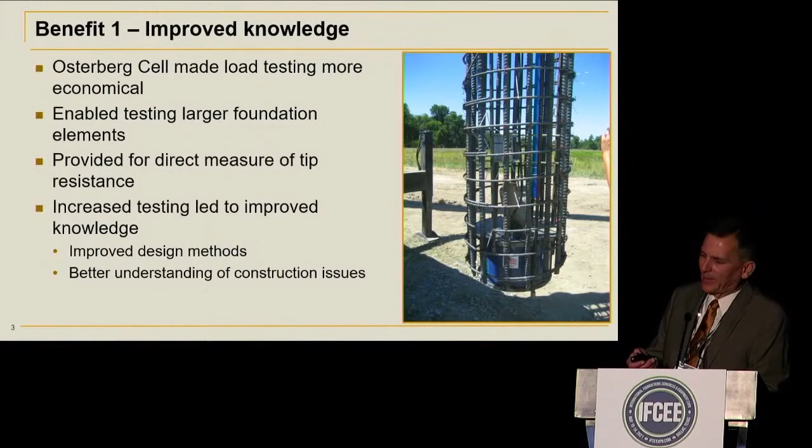By collecting all of this information, I really don't think it's an understatement to say that this dramatically improved our profession in many ways. I don't want to talk about this too long, but I'll give you one example—some work we did for the Missouri Department of Transportation about 10 years ago.

MoDOT began using drilled shafts around the mid-90s, and understandably had a conservative design posture. But because of the increased testing afforded by bidirectional load testing with the Osterberg cell, they were able to collect, through a series of projects and some funded research, a relatively large number of load tests, combining those with load tests from surrounding states. These are load tests in shaly materials—siltstones, mudstones, and the like—which allowed us in relatively short order to collect a large number of test results.

So we could look at design practices. At the time—and some people still use this—the method by Rowe and Armitage, which if you read their paper, was admittedly a conservative method, theoretically based along with some limited testing. Now, with the advent of the O-cell and collecting more and more load test data, you can see that plotted there. Not all of these data points actually achieved failure, and I'm looking at tip resistance at the moment.

If we isolate the tests that happen to achieve failure in tip resistance, you'll get a clearer picture about the conservatism that's inherent in that design method. The data points circled in yellow correspond to tests that actually achieve the ultimate tip resistance, or at least some tip resistance that would be considered failure.

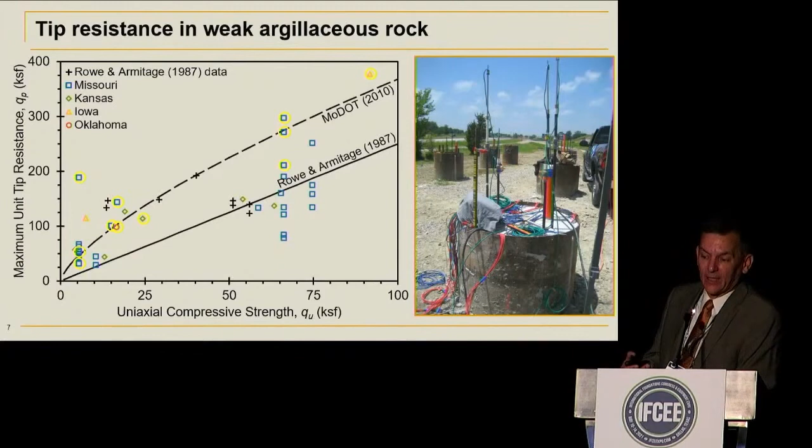But this really wouldn't have been possible without bidirectional load testing. We just wouldn't have had the funding to be able to do that many tests and the capability to achieve those results. So I think it's kind of unquestionable, the significant impact that bidirectional testing's had.

There are some additional benefits to bidirectional loading, and I'm going to move away from the Osterberg cell, so to speak, and just talk about other ways to do bidirectional loading. There are two more benefits, but the second benefit we can get from bidirectional loading is actually improved performance. This isn't about measuring the capacity or performance of a foundation, it's actually about producing an improved performance of the foundation.

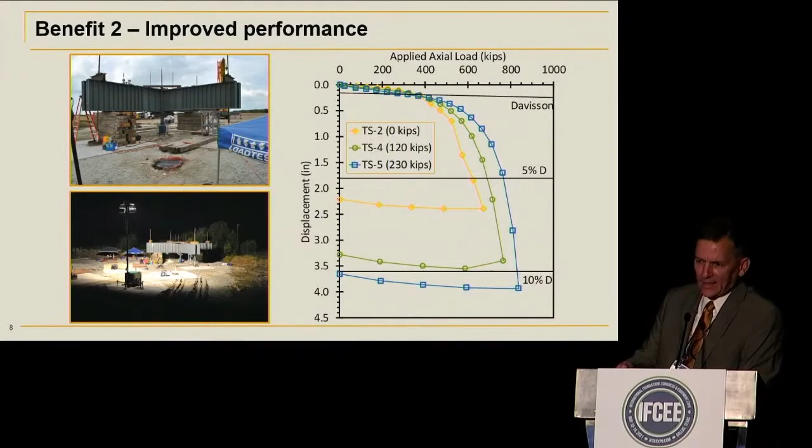So this is a mechanism for improving the performance of it due to that bidirectional load.

And so we're going to mobilize downward, or negative, side resistance as the post-grouting is occurring, trying to push up on the shaft. At the same time, we're going to mobilize positive tip resistance as the device is really pushing on the ground down below the shaft.

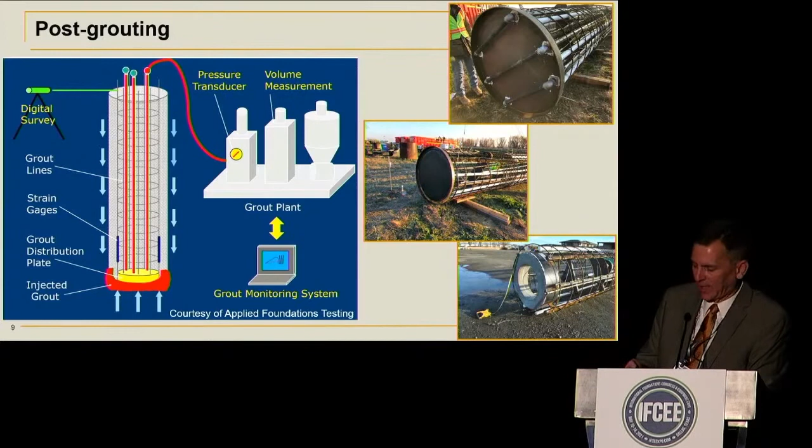So why is it that applying this bidirectional load produces improvement in performance? The concepts for this are really documented by Fleming out of the UK in the early 1990s. I'm going to go through a couple of slides that illustrate the concept — these are simple conceptual representations of load settlement response.

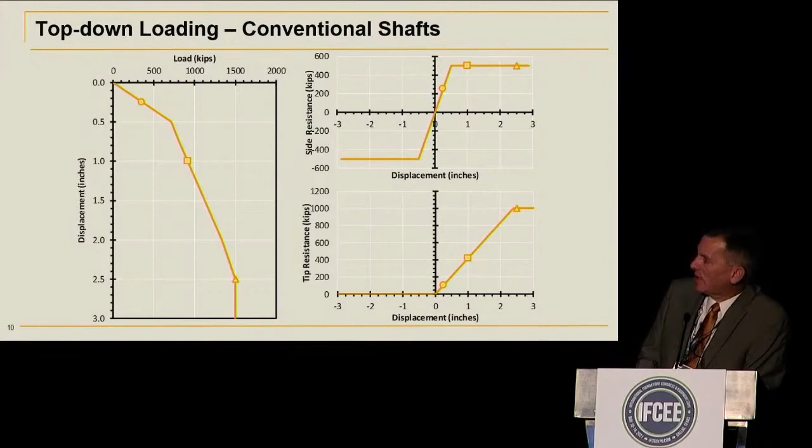We mobilize side resistance at relatively small displacements — we've fully mobilized it — and we've mobilized more tip resistance, but there still remains a considerable amount of tip resistance to be mobilized. Looking at an even higher load corresponding to the triangular symbol, that corresponds to a condition where we fully mobilize both side and tip resistance, representing the ultimate resistance of that shaft.

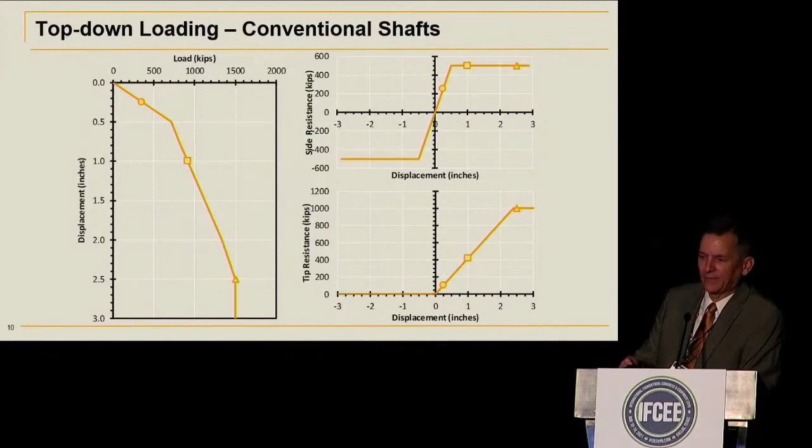So if I now consider this with bidirectional loading prior to top-down loading, essentially this bidirectional loading produces an initial loading from which the top-down loading then follows. Whether this happens because of a post-grouting operation or because of putting in some other kind of device doesn't really matter — this is a mechanical thing, not really a device-specific thing.

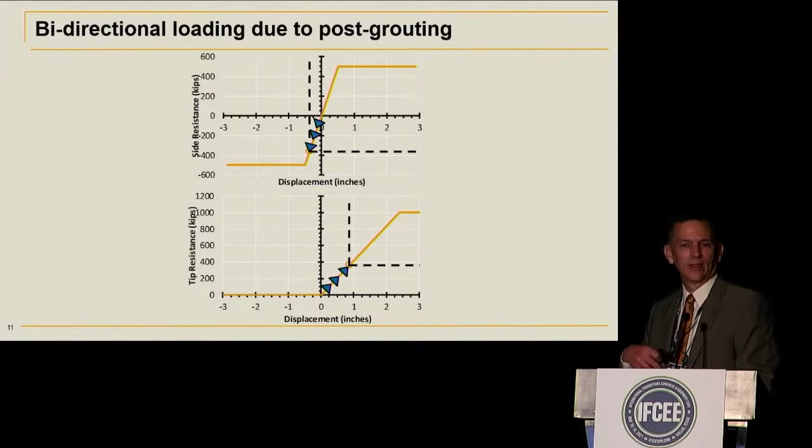When we apply bidirectional loading, we're going to be pushing up on the shaft above the tip, and pushing down on the ground below the tip. That's going to pre-mobilize some resistance, negative side resistance in this case and positive tip resistance. Essentially, that pre-mobilized resistance is going to influence the subsequent top-down loading.

It's giving us a new starting point from which we begin top-down loading. We can even think of it as residual load if you wanted to consider it that way. So what I've shown here is the top-down loading subsequent to that bidirectional loading, and the dashed coordinate axes on the figures on the right represent the loading that was pre-mobilized prior to subsequent top-down loading.

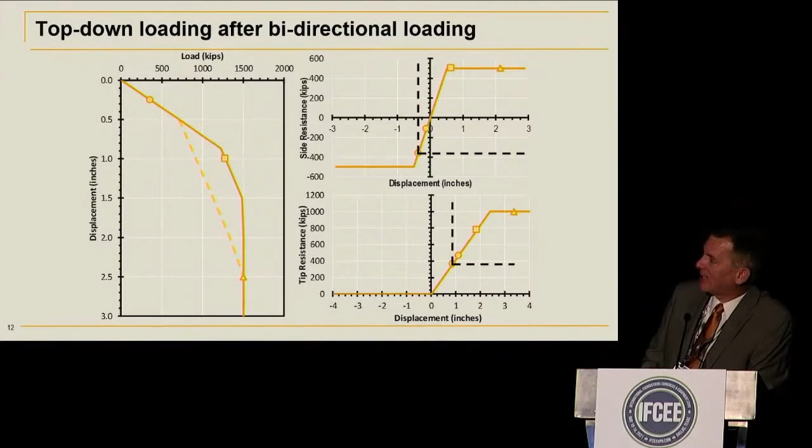On the load settlement curve on the left, the dashed line corresponds to the conventional shaft, and the solid line corresponds to a top-down load test after doing the bidirectional loading. You get this stiffer response, more resistance at a given settlement, less settlement at a given load, at least for the intermediate load levels. It's very similar at low load levels and the same at very high load levels. It's the intermediate load levels where we get the improved response.

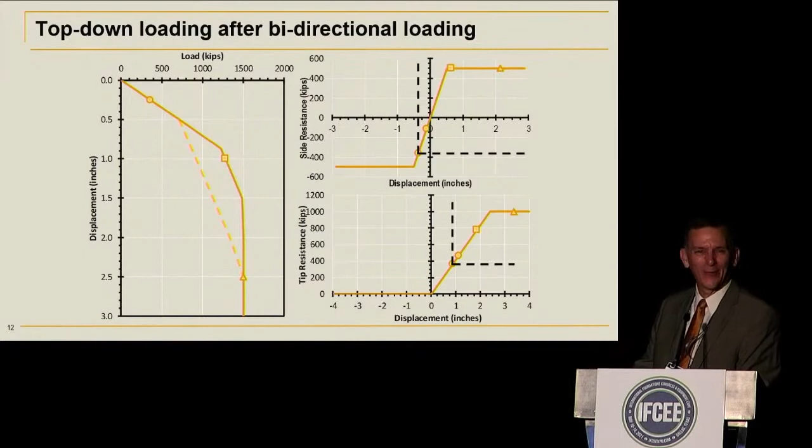This is a purely mechanical thing. There's no ground improvement involved with this. This is really just about preloading and the benefit that you can get from that preloading.

I'll show you some experimental measurements that confirm that concept, but an important piece here is that the degree of improvement depends on the magnitude of that pre-mobilized load. The greater the load you can pre-mobilize prior to the top-down testing, the better performance you're going to get in that subsequent top-down testing, which is a fantastic thing.

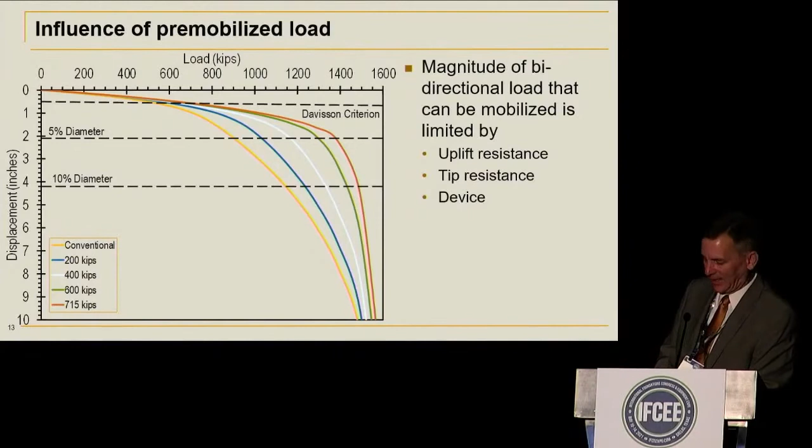So that tells you, okay, great, let's put a lot of load into the shaft. Well, that's great, and that certainly is an objective. But it's important to recognize that the magnitude of load we can mobilize in a bidirectional sense is limited by the least of uplift resistance of the shaft, the tip resistance of the shaft, and potentially the device, depending on the specific device. We can only mobilize load to a level where we exceed one of those limits, and we need to keep that in mind. I think that's a place where, in practice, we sometimes get ourselves into trouble.

In addition to the testing we did at Texas A&M, more recently we were fortunate to do some work for the California Department of Transportation, Caltrans, to look at this a little more closely. We did a similar load testing program where we tested one conventional shaft that wasn't bidirectionally loaded, and then three other shafts that were bidirectionally loaded. The load settlement curve for shaft T1 represents the conventional shaft, while the other three curves represent shafts that were bidirectionally loaded prior to the top-down loading, to a very similar load for all three shafts.

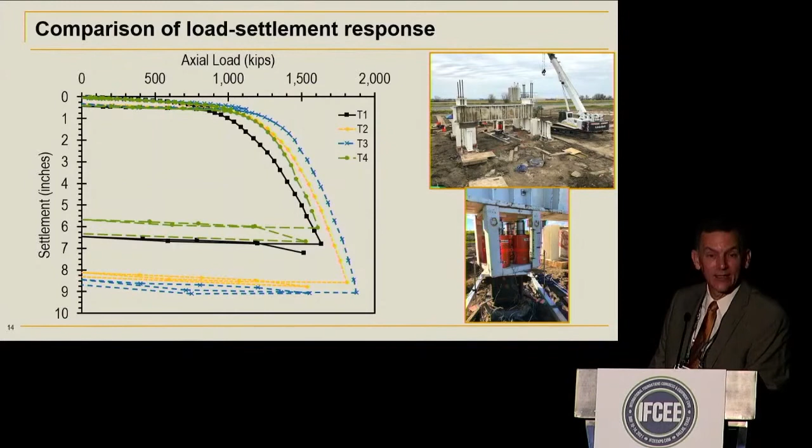Again, you see that we get this improved performance, more load at a given settlement, less settlement at a given load, for the shafts that were bidirectionally loaded prior to the top-down loading.

We can look at the load transfer a bit to confirm this. I'm looking at two graphs here. The one on the left corresponds to the loads measured along the length of the shafts during bidirectional loading and during the post-grouting operation, and you'll see we achieved a peak load at the tip of the shaft on the order of 400 kips. Following post-grouting, that load did relax a little, dropping down considerably, especially at the tip, a little less at the top.

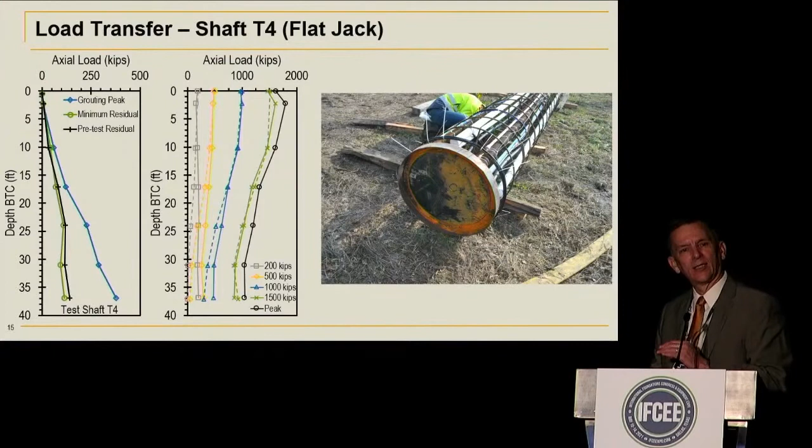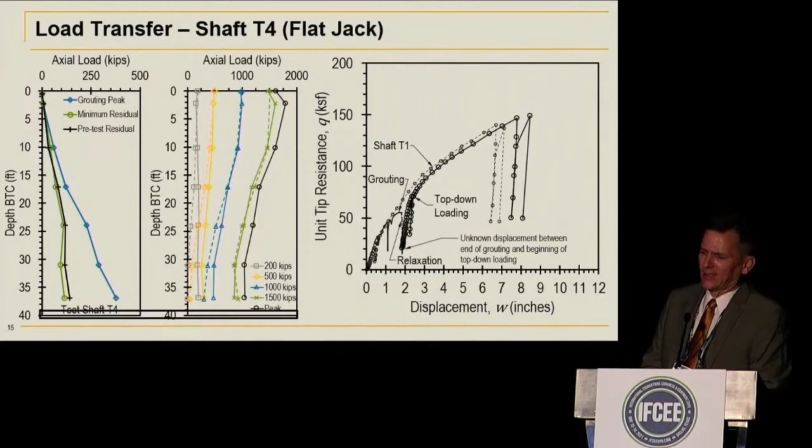It turns out that this relaxation, which I was quite worried about, is probably not something we need to worry about very much, because if it relaxes, we get the improvement in tip resistance, or an improvement in the tip response. If it doesn't relax, we get the transfer to the side resistance.

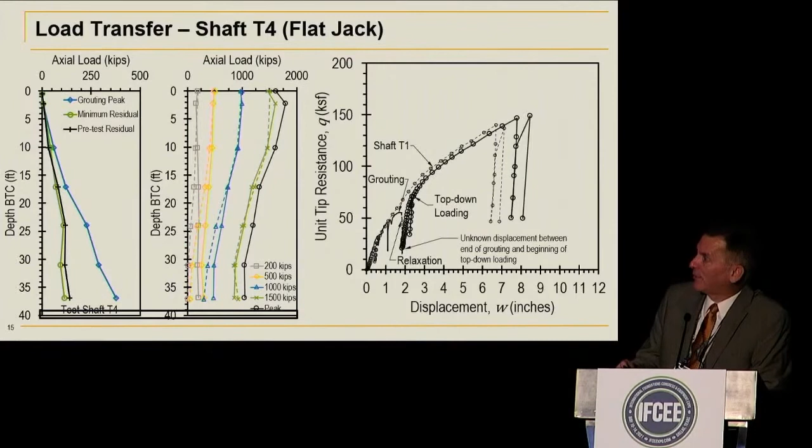So to summarize about this pre-mobilization concept, I think it's pretty clear. We've done these two experimental studies to really confirm that this is one of the mechanisms producing it, and really the predominant mechanism doing it. With an open-type grouting system, we can additionally get some ground improvement. I'm not arguing that ground improvement can't occur, only that this pre-mobilization of load is really the predominant mechanism for the improved performance we see with post-grouted shafts.

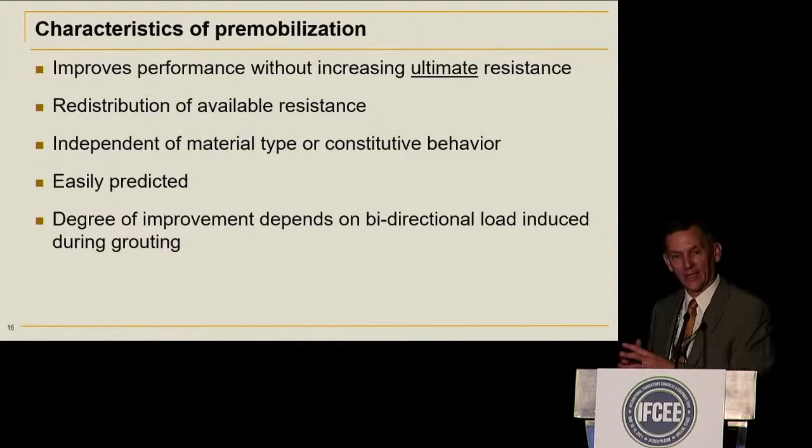It's an improvement in performance without increasing the ultimate resistance. I've underlined ultimate there because ultimate is not the nominal resistance that you get from most design calculations. That is the nominal resistance, a conservatively biased resistance. When we say ultimate here, I'm talking about the real ultimate resistance that we would get at very large displacements, something we don't get to measure very often, to be honest. In some ways, you can consider it to be a redistribution of available resistance.

And so again, it's not having this ground improvement. The most significant thing about this pre-mobilization concept, I think, is that it's independent of material type. This happens in sands, silts, clays, weak rock, strong rock, you name it. This is really about mechanics, not about some ground improvement that we're trying to do beneath the ground.

It's pretty easy to predict. You can predict it with relatively simple t-z analyses. You can even predict it with simple hand calculations, kind of like the conceptual diagrams that I showed you earlier.

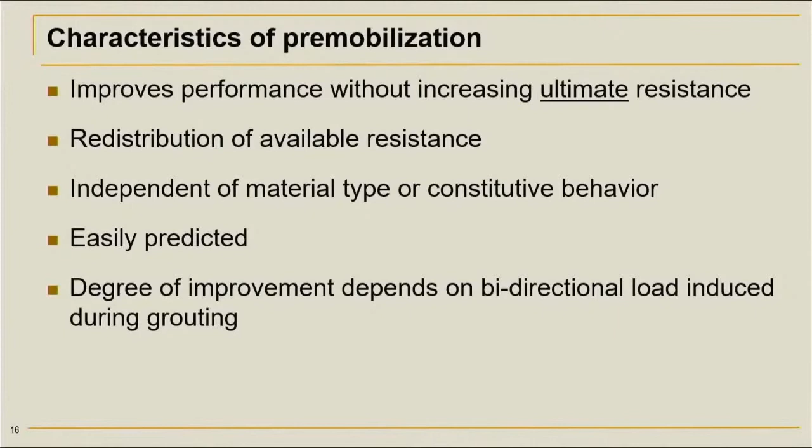The trick here is that the degree of improvement depends on how much load we can induce prior to top-down loading. The bigger the load, the better improvement we're going to get, and that's certainly the benefit. So I think it's pretty clear at this point that this is a reliable thing, something that we can predict, something that we can count on.

Unfortunately, it's a pretty difficult thing to try to implement, and Silas Nichols and I have had a number of conversations about how we can actually try to take advantage of this improvement. And it's tricky, not because the mechanics are difficult or unreliable, but because of the way that our design methods have really been developed.

Most of our empirical design methods are really displacement constrained, right? They're all, somebody's interpreting what the failure load is, either by some failure criteria or by the load that they achieved or other judgment on that part. And so when we talk about calculating drilled shaft capacity, that's not really the ultimate capacity. That's a number we've developed over time to use for our design, which is certainly fine, but it makes it difficult to take advantage of this improved stiffness we see from the bidirectional loading.

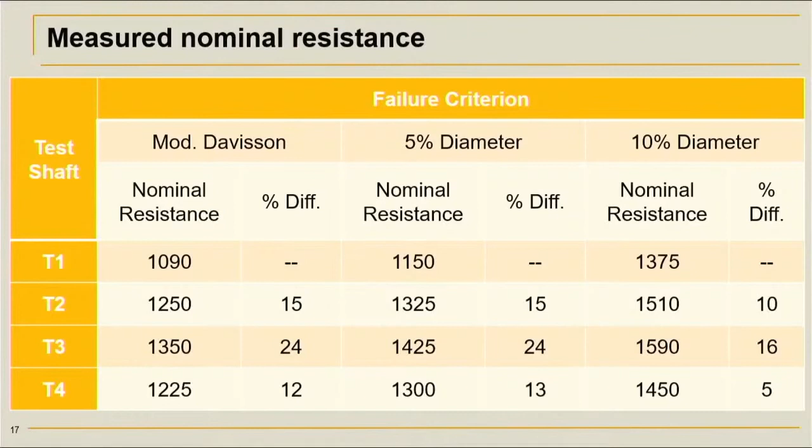So we can try to take advantage of that, and what I've summarized here is for the test that we performed in California. So T1, the first row of the table, represents the interpreted failure load for different failure criteria: using the modified Davisson criteria, a criteria that's 5% of the shaft diameter, and a criteria that's 10% of the shaft diameter. So you get different failure loads for different failure criteria.

The remaining three rows correspond to the interpreted failure load for the three shafts that were subjected to bidirectional loading prior to the top-down load testing. I'll focus you on the percent difference there. And what you'll see is it varies depending on the failure criteria you pick, and varies a little bit from one test to the other.

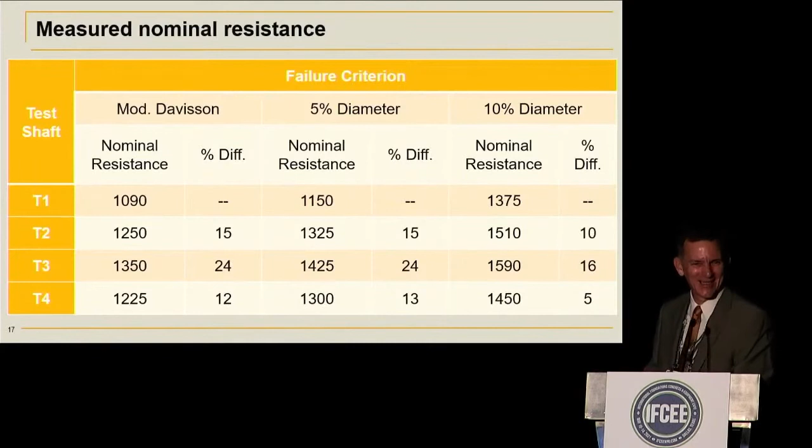But we're talking about oftentimes on the range of 10 to 20, to maybe 30% improvement in that design capacity that we can count on just from this bidirectional loading, which is certainly nothing to sneeze at, but it's also not 50%, it's not 100%. It's not huge, and so it tends to be a thing that's a little bit difficult to take advantage of.

Although one can certainly do that. So that's benefit number two: again, an improved performance because of this bidirectional loading, and I think that's certainly beyond what maybe I don't know what Dr. Osterberg was thinking, but I think that's probably a little more than he was thinking.

The third benefit is really improved reliability, and this is really, in my mind, a combination of the first two benefits. The idea here is, well, if we can go out and apply a bidirectional load with post-grouting devices or some other devices that are less reliable than a conventional bidirectional cell, but nevertheless applying some loading, well then, if we're applying load, then we're actually proofing the resistance of that specific foundation element to some level.

And so one of the things we can try to do is, if we're going to do that a little bit more economically, we can actually do that for every shaft. And so that really is a game changer in terms of the reliability.

And so now, instead of going out and doing one load test, getting an estimate for what the side and tip resistance are, and using that for the remaining foundations at a site, we can actually go out with one of these devices and proof load test every foundation element, much like we would do for ground anchors, where we actually proof load everyone.

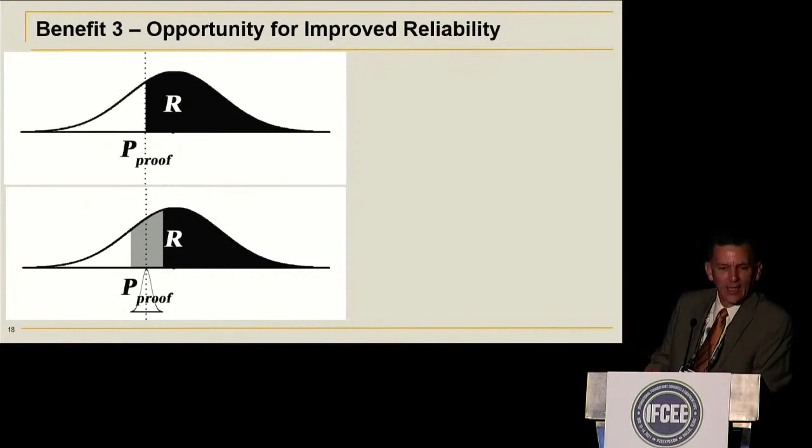Shadi Najjar and Bob Gilbert out of the University of Texas developed the math, the reliability calculations to do this, and we can use that with an uncertain proof load to actually calibrate resistance factors.

So you see the two dominant factors here in terms of reliability are: one, how reliable is the bidirectional load that's really your proof load, and two, what's the magnitude of that bidirectional load. As you consider a more reliable load and a larger load, a higher magnitude, you can actually use higher and higher resistance factors to achieve the reliability you're pursuing.

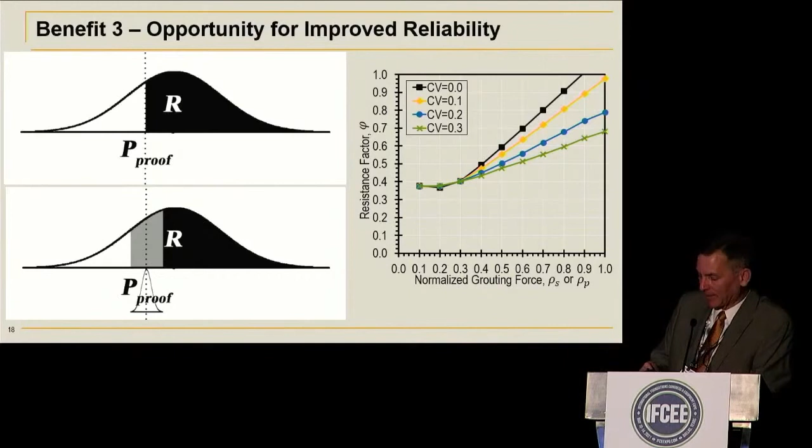We were developing these ideas around the time we were going to do the load test for Caltrans, so we decided to post-grout all of our shafts, including our reaction shafts.

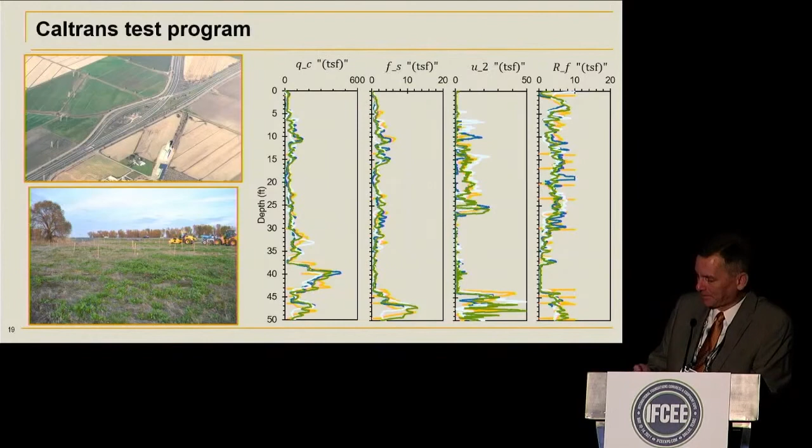This is the load test site, just north of Sacramento in the Sacramento River Valley, a couple of miles from the river in the floodplain. The site consists of about 25 feet of silty clay soils overlying another 20 feet of sandy soils that vary a bit in density.

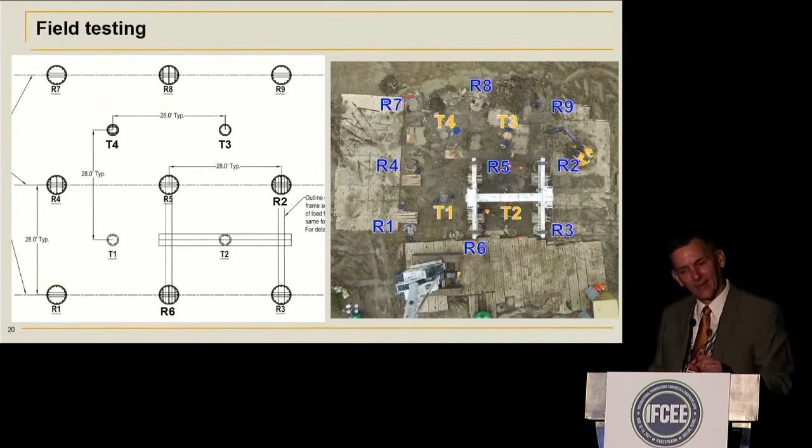The testing program here included 4 test shafts. Ironically, this pre-mobilization benefit can't be captured with a bidirectional load test—it produces benefit from bidirectional loading, but to capture it you have to do top-down tests. So we did top-down tests, which meant we needed reaction shafts. We took advantage of those reaction shafts by post-grouting and bidirectionally loading them to get an estimate of how reliable the load was from those different devices.

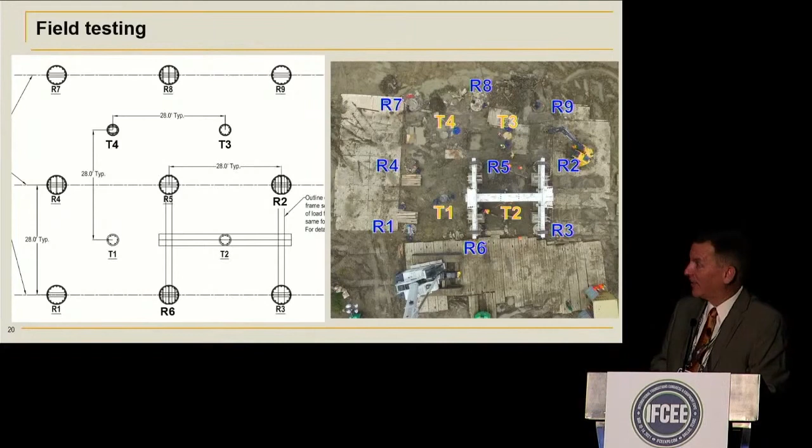We considered 3 different devices: an open sleeve port device, a closed flat jack device, and a rim cell for one of the reaction shafts. I'll show you those measurements, which we used to establish the uncertainty in the load being applied from these different devices.

I'll start with the flat jack device first. I'm showing 4 different graphs, associated with different reaction shafts: shaft 3, 5, 7, and 9. In each graph, the horizontal axis is the measured grout pressure during post-grouting, measured at the grout plant. The vertical axis is the measured force—the force measured using strain gauges installed just above the grouting device and monitored throughout the grouting process. What we're trying to look at here is how reliable grout pressure is as a measure of the actual force that was installed.

The green lines shown there, labeled as theoretical, represent the theoretical relationship between grout pressure—assuming it acts over the entire area of the device—and the force. What we'd like is for our measurements to follow those theoretical curves. There are two lines in this case because there's some ambiguity about the actual area of the device, but that's a pretty small issue.

For all four reaction shafts with the flat jack devices, there was a nice linear relationship between the pressure applied and the force measured, which is what we were desiring to see. If you look at the bottom two, at higher loads or grout pressures—around 1,000 kips—the relationship between grout pressure and force deviates a little from linear. Why that's happening is a subject of discussion and debate, but it's certainly what we observed experimentally.

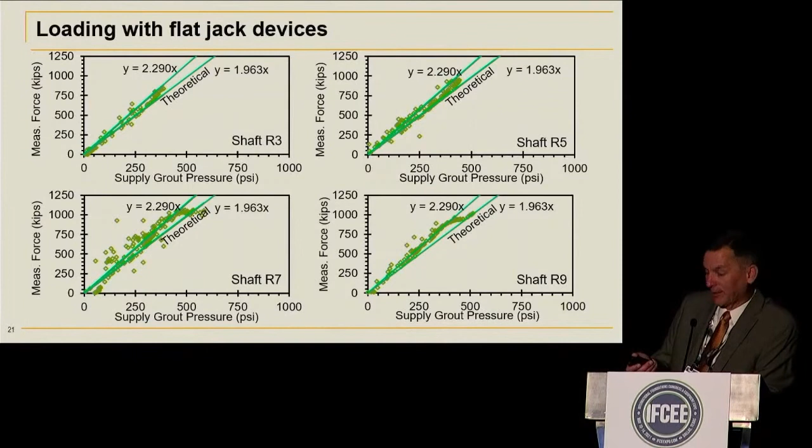As a result, for these open sleeve port grouting devices, I think it's mandatory that we install strain gauges and have an independent measure of load. You can't use pressure as a good surrogate for the load you're mobilizing—you need strain gauges to do that.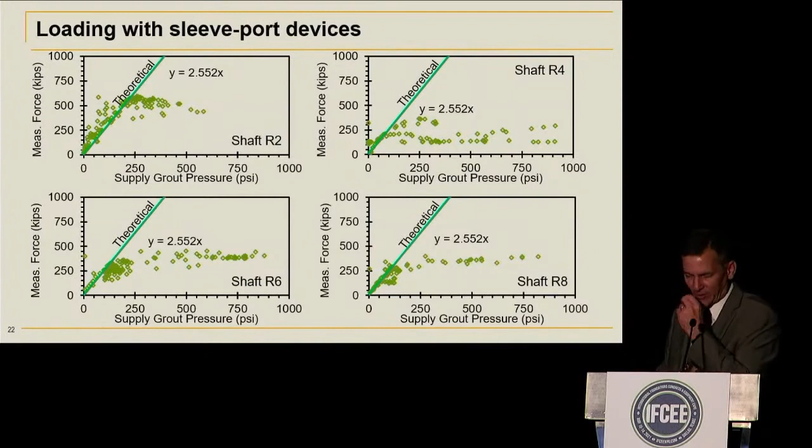With strain gauges, if you've interpreted them before, you know the stiffness of the concrete is a very tricky thing to deal with. Because of that, when interpreting load from strain gauges and dealing with the uncertainty in the modulus of the concrete, we assign a coefficient of variation of 0.25. Conservatively, we can argue that number is probably a little lower, but we assign that to the sleeve port devices.

We used one rim cell device on a reaction shaft, and also had a test shaft with rim cell devices. This rim cell is a proprietary device from Load Test that gets sealed up in the concrete of the shaft and is used to apply bidirectional load.

You'll see the data are scattered here, and I have to apologize a bit for that. For logistical reasons we used a grout plant appropriate for post-grouting to apply load using the rim cell, which would generally use a much smaller pump. We had a hard time with our vibrating wire instrumentation keeping up with the sequence of loading—it happened pretty fast. So some of the scatter is really a result of the pump we used, not so much the device itself.

But I think it's clear, if you look through the scatter a bit, that in both cases there's a nice linear relationship that matches the theoretical one. I will say we cheated a little bit.

There's an inference about the modulus here that we've made to match it up, but the linear part is really something that we measured, and that's the key. Based on these measurements and based on the fact that the rim cell is really a sealed up device within the concrete, we assigned it a coefficient of variation of 10%, just slightly less than what we would get with the flat jack.

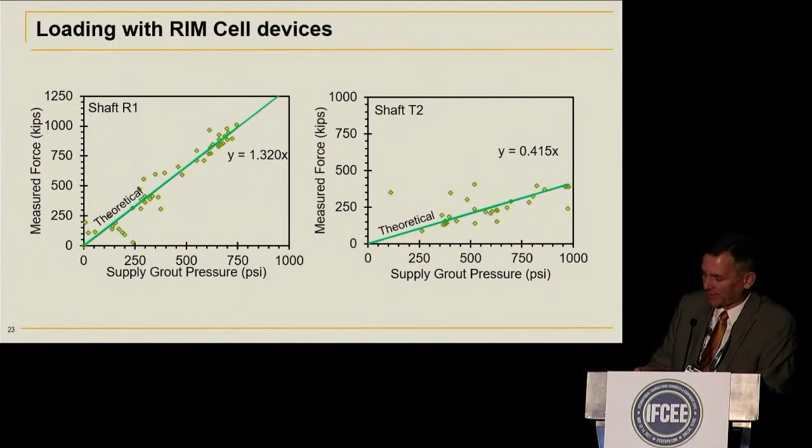I still think that's again from two shafts at one site. We need more measurements of this relationship to be able to better define that uncertainty, but that's what we use to do that. So if you put that all together, what we've recommended to Caltrans, as a means for trying to implement these concepts, is this graph.

The curves for resistance - this is the graph of resistance factor versus the normalized force from this bidirectional force. Three curves: one for the rim cell, one for the flat jack, and one for interpreting load from the strain gauges. Those correspond to the different uncertainties in the load, right?

Again, I think those certainly are a subject of future work. You'll note that we cut off the resistance factors at a value of 0.5, or whatever your nominal resistance factor that you would use for designing a conventional shaft, whatever method you're using, you would limit to that, and you would use those resistance factors.

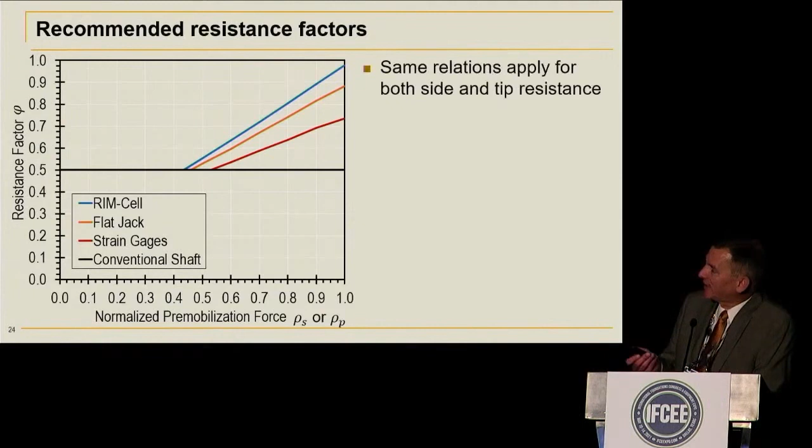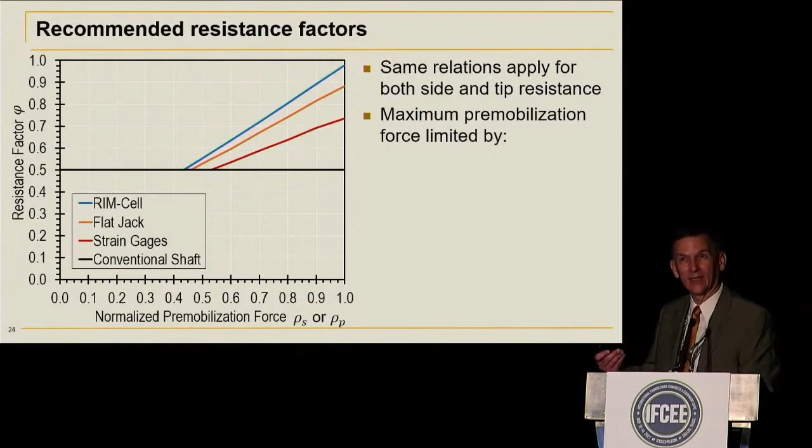Interestingly, the same relationships apply for both side and tip resistance. This is just a simple probability calculation that's pretty straightforward. We're not reliant on any method for predicting side resistance or tip resistance. So the relationships are the same for side and tip resistance, but we've got to be careful here.

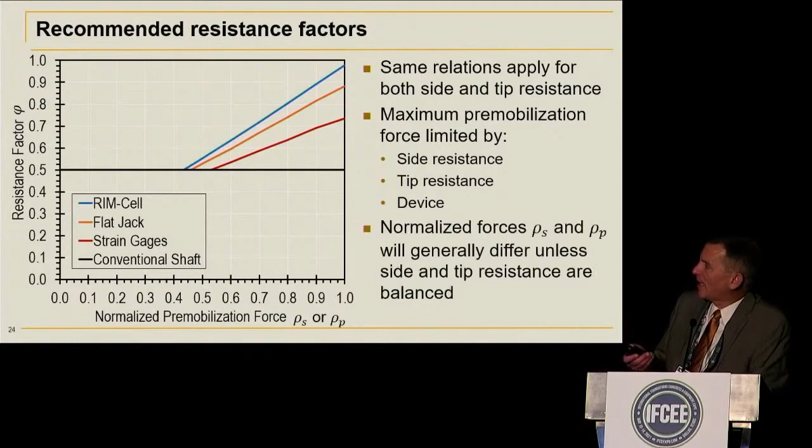The actual value of the resistance factor we would use may vary and differ for side and tip resistance depending on the conditions. The maximum force that we can mobilize is again limited by this side resistance or tip resistance or the device, and we need to keep that in mind. The normalized forces for side and tip resistance will generally vary. I'll show you a couple of quick examples here to illustrate that.

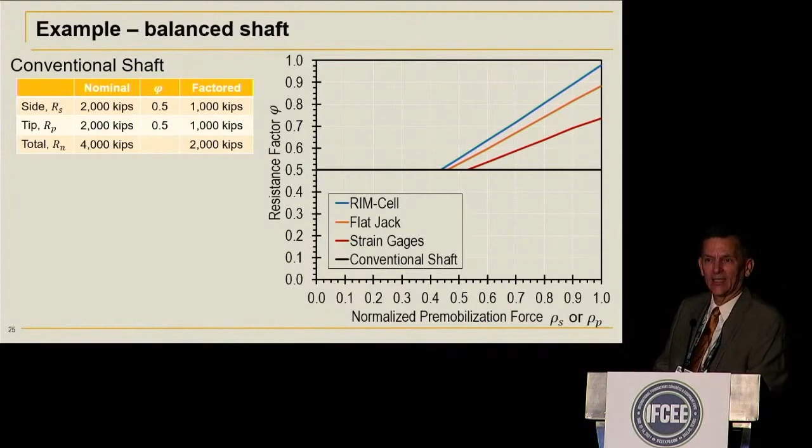So just to give you some idea of the magnitude of benefit we can get from this premobilization, the example here is for a balanced shaft, and I'll tell you a balanced shaft is the ideal shaft. Having the same side and tip resistance means we can mobilize a greater magnitude of load and therefore count on higher and higher resistance factors for those loads.

So if we just define this conventionally, consider a conventional drilled shaft and the table on the top left. In this case I said side resistance is 2,000 kips, tip resistance is 2,000 kips, so our total nominal resistance is 4,000 kips. If we just say we're using a resistance factor of 0.5 to average out something that we would commonly use, our factored resistance turns out to be 1,000 kips in side resistance, 1,000 kips in tip resistance.

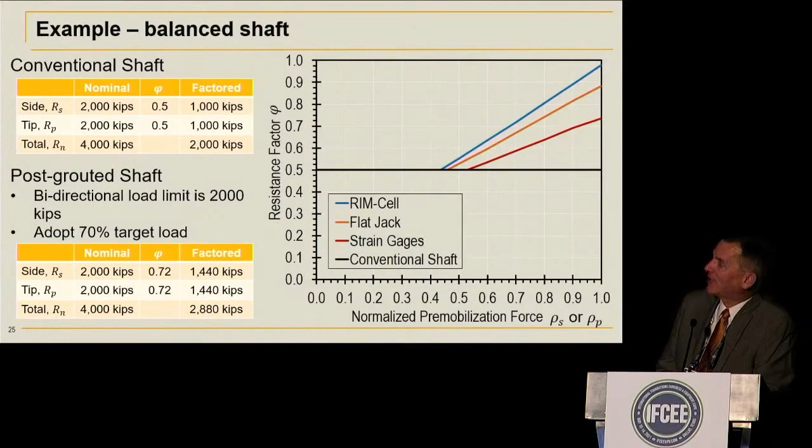And so a total factored resistance of 2,000 kips. If we now take the same shaft, with the only change being we're going to apply a bidirectional load before putting it into service, before doing the top-down load - in this case, since it's a balanced shaft, the maximum bidirectional load we can apply is the least of side resistance or tip resistance, so that's 2,000 kips in this case.

I'll get to the point of we're going to adopt this 70% target load, meaning we're not going to target going out to apply 2,000 kips because we might not get that for every shaft. We're going to reduce that a little bit to make sure that we can achieve that proof load. So if we adopt that 70% target load, we can go from this graph, and our normalized premobilization force would be the 0.7.

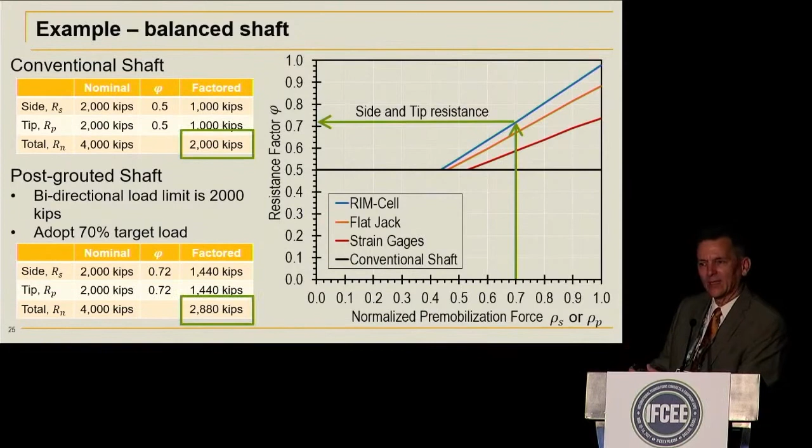We can go up - if we're using a RIM-Cell, just to look at the optimistic case here, we would get a resistance factor of 0.72. We apply that to both side and tip resistance because they're the same in this case, and so we end up with, just by applying this bidirectional load, an improved factored resistance by about 45%. So now our factored resistance is 40% greater than it was before we did that, just because of the reliability benefit of the bidirectional loading.

It's not always that good, so it can actually be - let me go back real quick - it could actually be better if we wanted to be a little risky and say, well, I want to try to get closer to that 2,000 kips, or maybe I think that 2,000 kips is a conservative estimate and I can go higher than that.

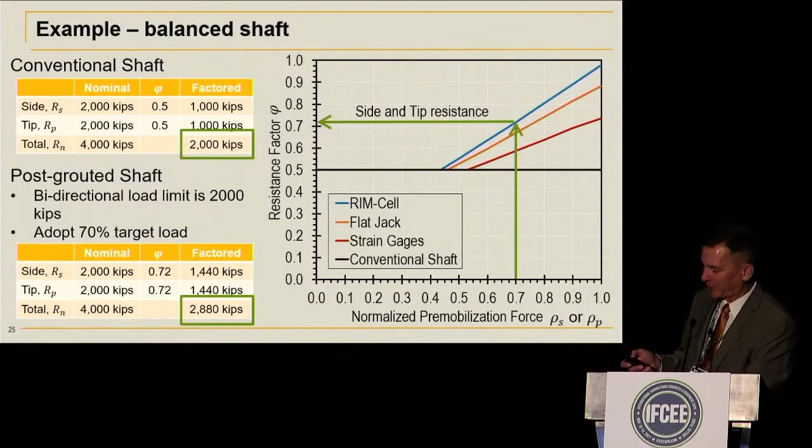Then you could get a little risky, and instead of using 0.7 for your normalized premobilization force, you could try to go to 0.8. But when you do that, you run the risk of potentially not being able to achieve that for every shaft. So the beauty is we can use higher and higher resistance factors. The risk is I've got to prove it when I get out to the field, so I've got to make sure I can do that. There's a risk-reward balance for the contractors and owners here that I think is pretty interesting.

The second example I'll give you is where the tip resistance controls. In this case the tip resistance is 330 kips, the side resistance is 820 kips, so I'm really limited by that tip resistance. You'll see the factored resistance that I would get for a conventional shaft is about 575 kips. If I do the same thing, but now considering that I'm going to bidirectionally load this shaft prior to putting it in service, my bidirectional load is now limited to 330 kips, the least of the side and tip resistance, so now I get a smaller load.

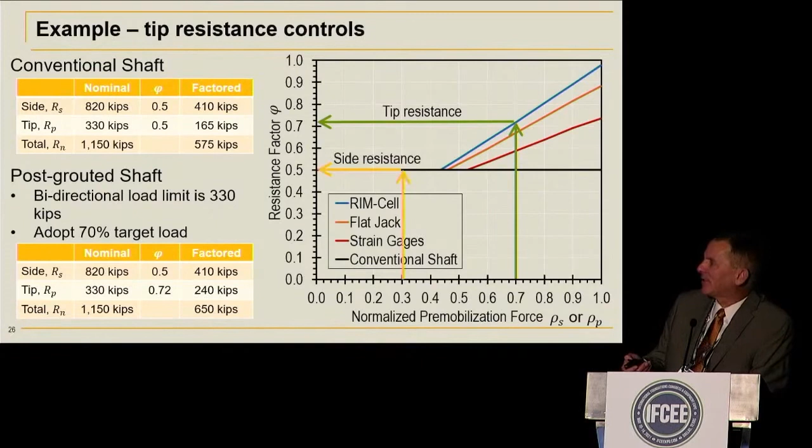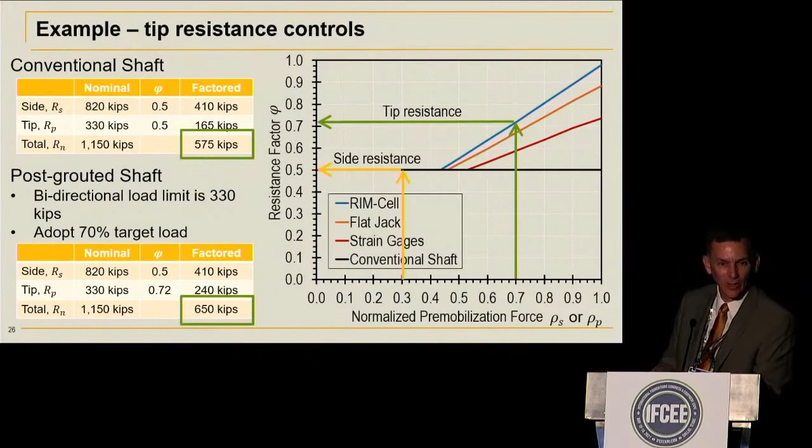If we're conservative with our target load, and want to get a little bit more aggressive, we can actually get even greater benefits. So the last couple of slides that I'll show here before closing are about this reduced target load. Why on earth would I want to not maximize my resistance factor? If I'm estimating that the resistance is 2,000 kips, why wouldn't I try to target the 2,000 kips so I could use a resistance factor that's even higher?

The reason why to do that is because if we go out to a site and construct 100 drilled shafts, or for that matter, drive 100 piles or CFA piles, whatever foundation might happen to be, we're going to have some variability and uncertainty in that resistance. We can't construct a perfect foundation every time. So we need to account for the fact that there's variability, even within a single site, in addition to uncertainty associated with not really knowing where our site is.

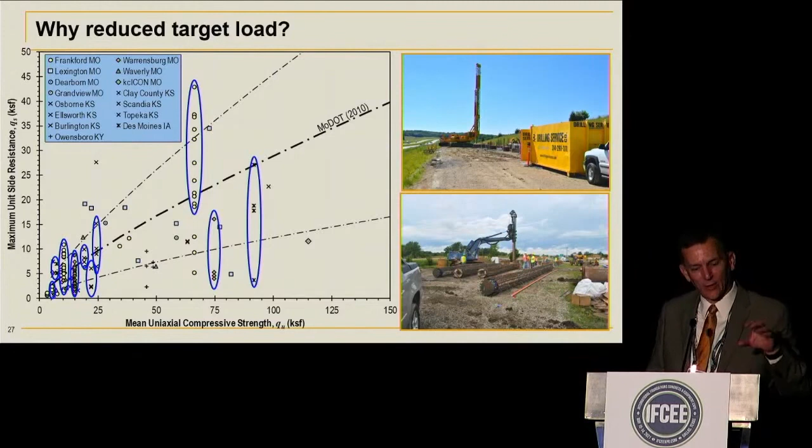I would say this is one of the areas where research is really needed to better understand how much variability occurs within a site, really either due to ground conditions varying from one spot to another, or due to construction practices varying things from one foundation to another, and how much of that's really due to uncertainty in our design method. So I think we can do a lot better than we have, but it requires some dedicated effort.

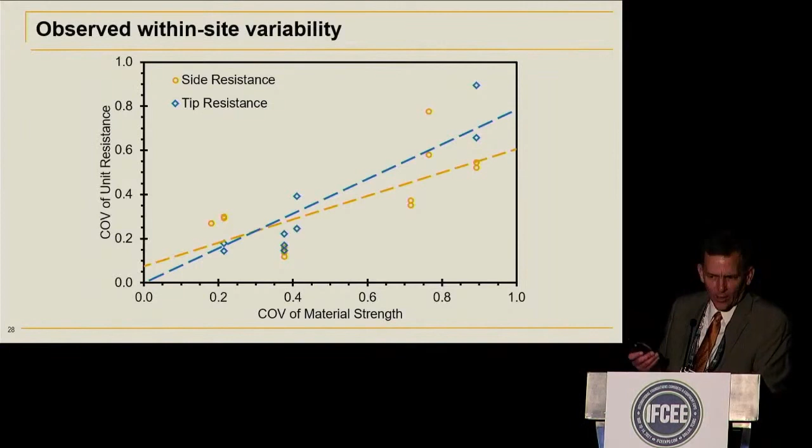The last thing I'll show you is some reliability analyses that Andy Boeckmann performed to try to look at the likelihood of proof loading success. Should I target 70% of my anticipated resistance, 80%, or 90%, with the recognition that if I get too aggressive, I can use a much higher resistance factor, but I'm more likely to have problems and not be able to achieve the proof load during construction.

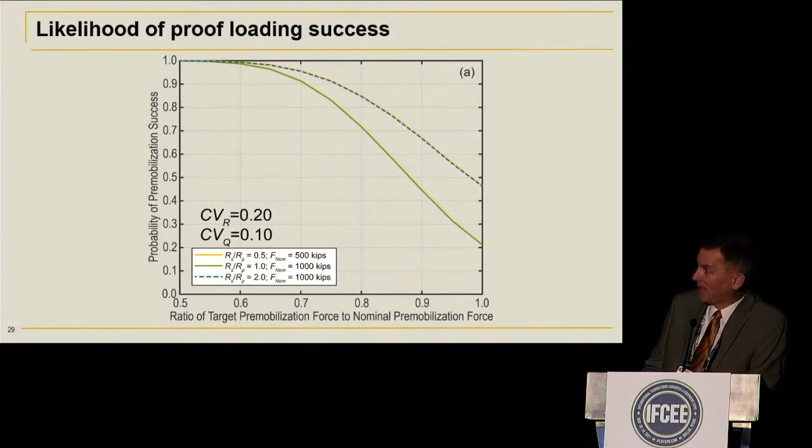So this is where the 70% comes from, and we've actually had a little internal debate about whether it should be 70% or 80%, but that's kind of the target value we're landing on, at least based on what we've done so far. I think that's obviously an area for...

In conclusion, I'll restate the three benefits. I think the first one is probably the one we've realized most significantly, that the bidirectional test really has, for drilled shafts—I don't think we would be constructing 15-foot diameter drilled shafts that are 200 feet long if we hadn't had the bidirectional test to confirm some things.

Certainly equipment advances have enabled us to build larger and larger elements and to better understand construction practices and other things, but I don't think any of that would really have happened without the better understanding we've got from doing bidirectional tests.

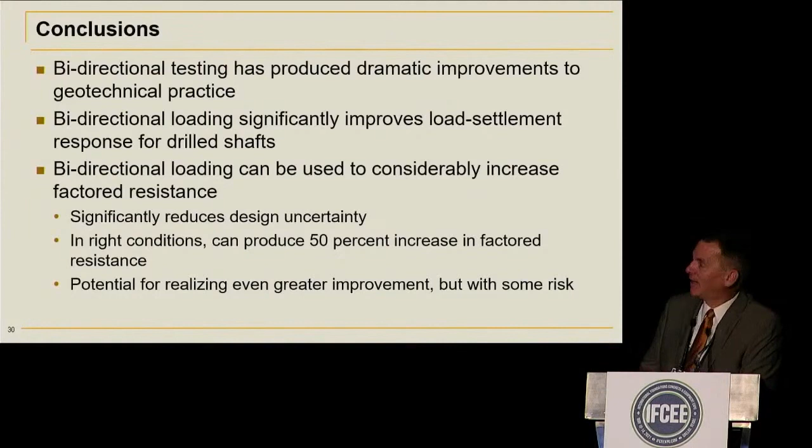I think it's clear at this point that bidirectional loading prior to top-down loading can actually significantly improve that load-settlement response—more resistance at a given settlement, or less settlement at a given load. But it's a little tricky to implement with our current design methods. Serviceability seldom controls design for deep foundation elements, mostly because of the way we've developed our practices.

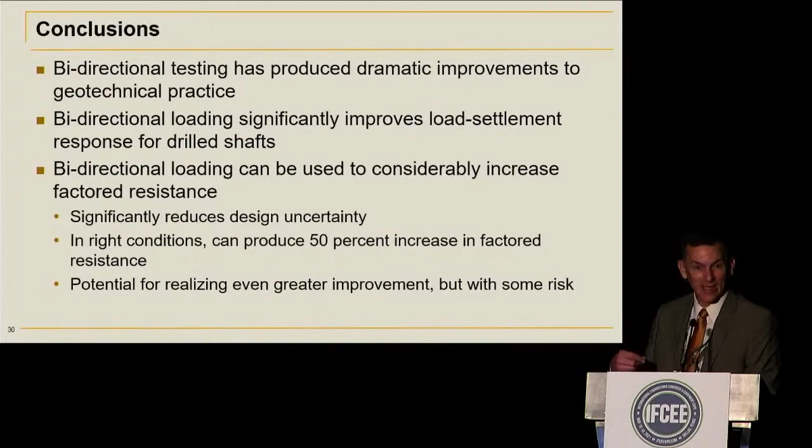The third benefit is the most exciting one to me: the potential to use this as a sort of imperfect proof test, but one that will allow us to use greater and greater resistance factors, design more effectively, and identify any problem foundations in the field. The benefit of doing that is the ability to design more efficiently and cost-effectively.

So with that, I will say thank you and conclude my presentation.

Thank you, Eric. Are there questions for Professor Loehr? Anybody? You've covered everything so well.

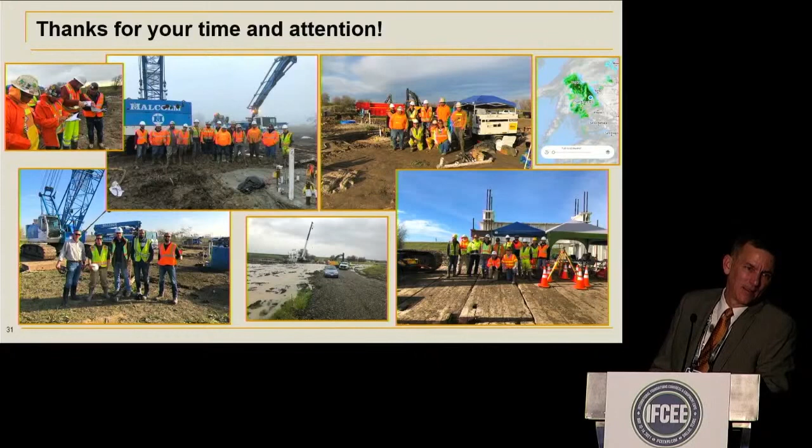One of the things I noticed was just a couple of different pieces of terminology, particularly at the end—how with these great advances and extra special efforts to improve these drilled shafts, what you're doing is trying to make them like driven piles. Dale, you have the concern of a residual load at the end of driving, right? How you've got locked-in negative side resistance stresses at the end of driving, just from the installation process, whether you're pushing it in or hitting it with a hammer—what do you have at the end?

The similar reliability type question: what if I do have a problem in this one, how do I know? So it is something of a proof testing. It's imperfect, but it's going to make you sleep better at night and allow you to be a little more aggressive if you know you're pretty much there all the time.

Exactly, right? Driven pile driving records, blow counts, are an imperfect measure of that pile's capacity. So in very much the same way, I think it's a very similar thing. Piles that are driven conventionally may have that residual stress, and I think our empirical methods inherently include that—all the load tests we've done include the effect of that residual stress—whereas with drilled shafts or other deep foundation elements, maybe those aren't so inherent in those practices.